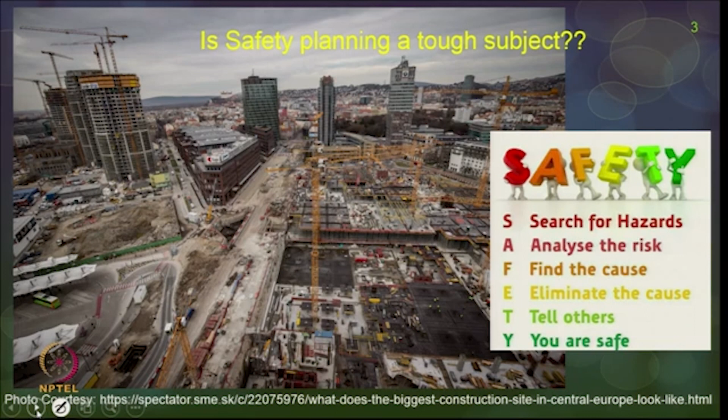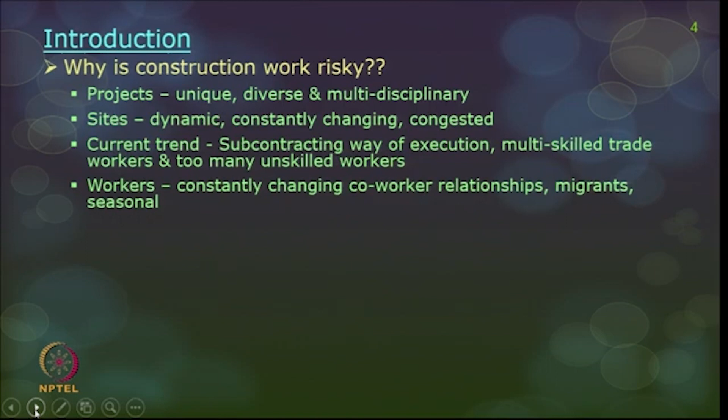Let us talk about why in construction we are not able to achieve a safe environment compared to other sectors. For example, safety is a major concern in every sector like aerospace or manufacturing or anything else. But why is it so fuzzy in construction, and why has it not been achieved even till date?

There are so many unique factors as regards construction projects alone, let us discuss a few of them. As such, let us talk about the projects - most of these projects are unique. For example, if you do manufacturing of a car, you may be manufacturing the same model repeatedly, so you know what the hazards are, you know the sequence without complicating too much, you know what safety precautions will suit you best, and so on.

In construction, projects are unique, so the learning you get in one project you may not be able to apply in the next four or five projects. That knowledge and experience you got from one project you may apply only after five or ten projects. That doesn't happen in other sectors.

Construction projects are always very diverse. You have so many engineers, starting from architects, structural engineers, MEP engineers, then your consultants, vendors, and suppliers. So many people come in and play their role. It is actually meeting different minds, and at the same time getting the work progress done while having a safe environment in place is quite challenging. As a result, projects are most often multidisciplinary.

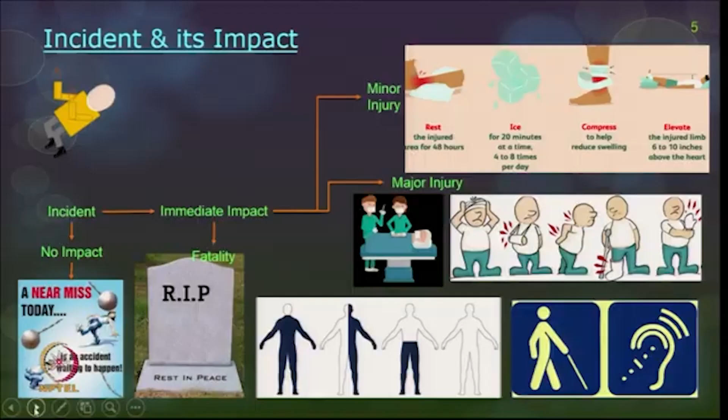The other type is a slow impact. There can be hazards which create slow impact onto workers. For example, if you work continuously with concrete or handle cement without proper gloves, after some time you may see a lot of cement dermatitis - that's primarily called cement dermatitis. These don't happen in just 1 or 2 days; it happens over several years, maybe 3 to 5 years, and some impacts can even happen 10 years later.

So these are all called health issues. Now if you look at incident impacts - I'm categorizing everything together - an incident can have no impact, called a near miss; immediate impact giving a minor injury, major injury, or fatality; and a slow hazard impact, which we call health issues.

If you look at the history of safety, which we'll discuss a little later, people were historically worried only about the visible impacts - what we call minor injury, major injury, and fatality. That's what was really seen by construction groups, and safety programs and policies were most often focused only on these safety issues in construction.

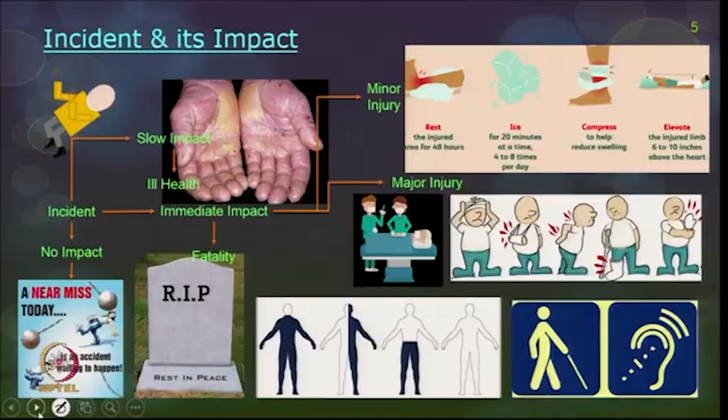Now let's talk about definitions. What is safety? Safety is always defined as an absence of danger or a state of protection. Next, a few terminologies from the previous slide - number one is incident. Any incident is an unplanned, unwanted, unexpected, unfortunate event which disrupts the work process and may cause an injury or damage.

Based on the impact, one type is near miss - incidents where no property was damaged, no personal injury sustained, but given a slight change in time or position, damage or injury easily could have occurred, and it didn't happen this time because of the luck factor.

Now there's something important in the definition. If you look at safety, most of the focus is only on personal injury - in the sense, only on worker injury. But safety as such has to take care of equipment, materials on site, and also personnel, which implies workers and other human beings on site. But colloquially, most safety norms and policies are primarily towards workers' well-being on site only.

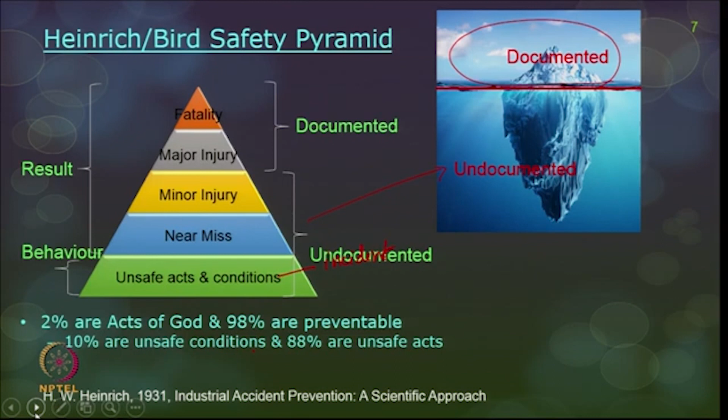Now let us talk about these unsafe acts and conditions. What are these? Unsafe acts are primarily related to workers or human beings. Unsafe condition is, for example, maybe you wanted to do substations in hilly terrain, or transmission lines in hilly terrain - you cannot change the situation at all. Hilly terrains have more dangers, and these are primarily referred to as unsafe conditions.

So what happens is, so far many people in construction think that safety is not actually emphasized, or we are not able to bring construction sites to zero accidents because of the dangers in unsafe conditions.

But a lot of statistics were taken up related to how accidents happen, how many accidents happened, what were the real reasons and so on. When it was completely analyzed, it was found 2% of all these accidents were acts of God, which refers to cyclones, heavy rainfall, tsunami, or earthquake. Fire is a man-made disaster, not a natural disaster. So acts of God can be anything related to natural disasters.

So 2% of accidents are related to natural disasters, and 98% of all these incidents happening at sites can be prevented - they are preventable. And if you zoom into that 98%, 10% of these causes are due to unsafe conditions, which you cannot avoid, or you can take efforts to safeguard your site. That is possible, but you may have to spend money on that.

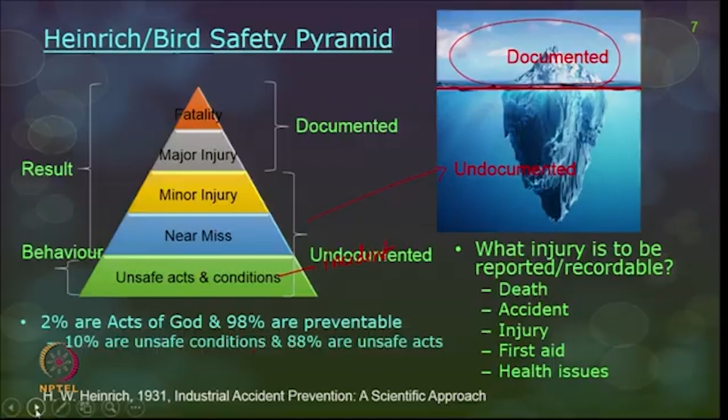Now what injuries have to be reported or recorded, so it acts as a lesson for future projects, so you can learn from a mistake. Any death obviously has to be reported: the reason for death, why and where it happened, what really happened, what the worker didn't do, what precautions the management didn't take. All this has to be reported.

Any accident in the site implying a major injury has to be reported for sure. Minor injuries, yes, if possible, and if you have a system in place to record all your minor injuries, that also has to be reported.

First aid cases, yes, including near misses, also have to be reported if you want a complete zero-accident record in construction sites. Near misses and first aid cases happen too often every day, but there should still be a policy of reporting and documenting everything, used as a learning lesson for all workers. Last but not least, health issues also have to be reported these days.

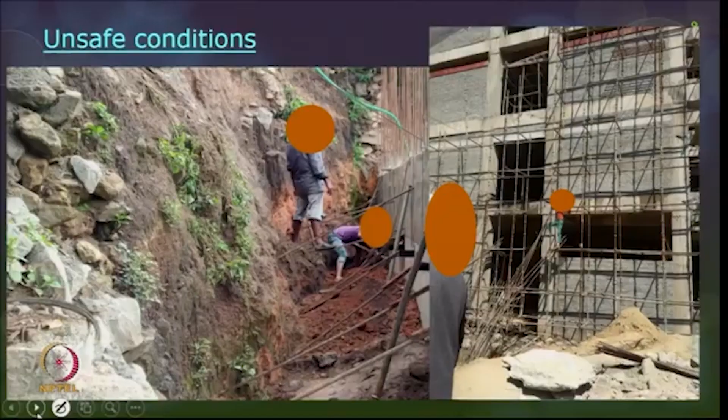Now let's talk about unsafe acts and unsafe conditions, two terms that have come up. Unsafe condition: if this place is too hazardous and dangerous, with no proper place for workers to stand and set up, and hardly any provision for safety precautions, as shown in this picture. You cannot avoid working on these scaffolds, climbing up and doing construction progress work. So this is primarily an unsafe condition, but there could have been provision for safeguarding the environment.

The next is unsafe acts. Unsafe acts are primarily ignorance of any safety rule. For example, in this first photograph, the workers are not wearing proper PPE, not proper safety clothes, shoes, or a hat while working in a construction site. And in this picture, a safety net, which is only meant to safeguard a worker or equipment that falls down, is actually being used like a dustbin to store unwanted materials.

So what is this unsafe act and unsafe condition? Unsafe act is an activity that is not done according to safety standards. Examples include failure to wear PPE, which is the number one unsafe act in construction sites. Ignoring tool defects - maybe you were operating equipment, it didn't work, and you don't report it to management but still try to operate and complete your work. Or you don't know how to operate equipment and try to mess with its functioning. All these are examples of unsafe acts.

Violation of health and safety rules - if you have to wear all your PPE like shoes, hard hats, and gloves, you have to work accordingly. Even if you are not comfortable, you should not remove the PPE and start working in a construction site. The next is unsafe conditions.

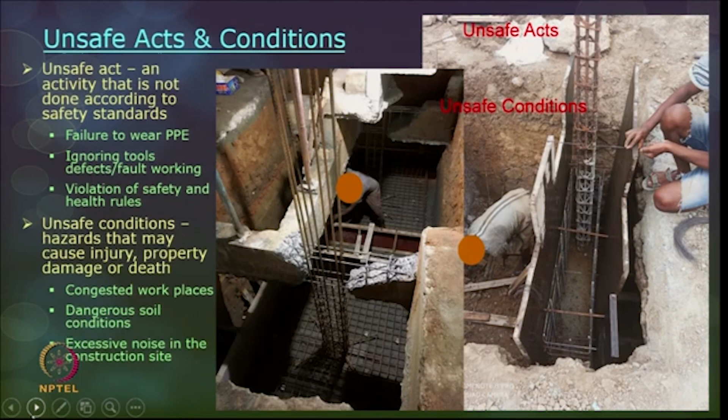Excessive noise in the construction site is also an unsafe condition. You may be working in a very big construction site, not operating any equipment yourself, but all around you there are so many equipments producing a lot of noise, many above the permissible decibel levels. When you are in the midst of so many equipments, your mind will not be at peace and concentrating on safety. So this is an example of unsafe conditions.

The next term which came along in the introduction was hazard. Many of these terms are used colloquially in so many places, but now you should learn the different terms and use the proper terms when talking about safety.

Hazard means an inherent property or ability of something to cause harm. As such, hazard is not dangerous, because there are three types of hazard, which we will discuss when talking about hazard analysis as a safety program. So every hazard is not active and it will not create any harm.

For example, there is an electrical wire passing along a line with equipment connected to it that was operating, so this is primarily an active hazard. If you slip or trip onto the electric wire and fall off, it can create a lot of hazard. Let's complicate the issue further: maybe it's lying along a floor where curing is happening, and curing has water beneath it, so then it becomes a very serious and active hazard. Hazard as such has to be identified in any project.

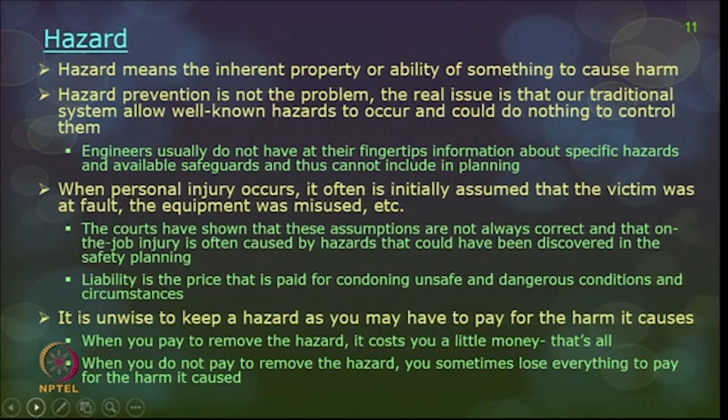That generally doesn't happen, because once the courtroom proceedings are over, it goes into the files and is not open to the public to be kept as lessons learned for other projects. So it is unwise to keep a hazard, as you may have to pay for the harm it causes. When you remove it, you have to spend a lot of money, but if you don't try to remove it thinking you may have to spend money, you may have to pay even more than anticipated. Sometimes you may have to lose everything to pay for the harm it caused. That is the real message behind hazard.

Some researchers have also identified the top hazards in a typical building project, and a few of them are: fire, unsafe scaffolds and working platforms, open shafts and edges, unsafe electrical equipment, unsafe excavations, unsafe cantilever loading platforms, struck by foreign or falling objects, unstable or unsafe structural members, overloaded vehicles and forklifts, unstable mobile cranes, unsafe lifting operations, unsafe working at height, unguarded machinery, and unsafe access or egress.

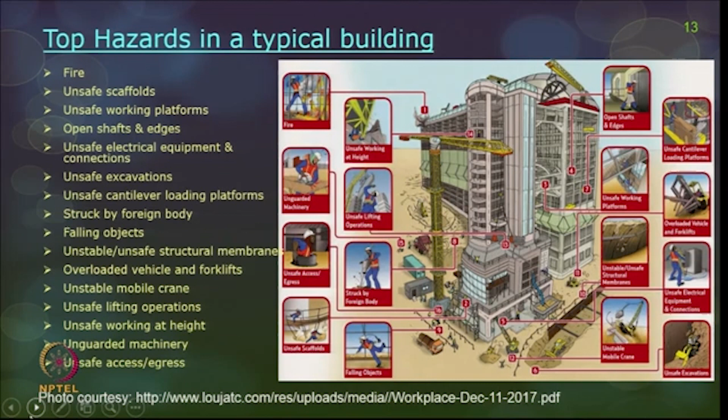So there are a lot of hazards still present in construction sites, and if you closely watch a project and note all this down, you can actually think of a lot of corrective and preventive measures for accidents.

Now let us move on into the terminology. So far we have discussed terms like fatality, major injury, minor injury or incident, near misses, unsafe acts, unsafe conditions, and hazard. Now we will move back to what fatality, major injury and minor injury are, and how these stand in the present scenario in construction sites.

As I told you, this pyramid has a lot of numbers attached to it. Heinrich proposed that for any one major injury there might be almost 29 minor injuries and 300 near misses, in a ratio of 1:29:300. A lot of researchers have given different numbers, and these numbers have come from different times and from different groups of construction projects.

If you want to know these numbers, it is quite necessary because you have to think of safety precautions, how many safety programs and how much investment in safety you make, primarily based on some assessment of these numbers in your project. So you may need an understanding of the number. Accordingly, other ratios are 1:100:10,000, 1:10:600, and so on — there are many such numbers available.

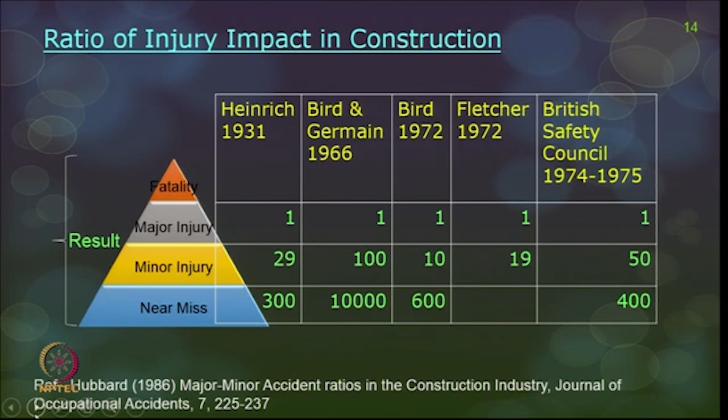But understand, the pyramid always has so many near misses compared to major injuries, and so many minor injuries compared to major injuries, and the same way to fatality. So that pyramid is still existing.

Now let us talk about fatality. We will go again from severe impact to the least impact. So number one is fatality.

If you look at projects which happened 50-60 years back, like the 1940s, 1930s, or 1869 and so on, there are very famous projects existing even today which are treated as wonders of the world. But if you talk about safety and the number of fatalities that happened, many of these are considered deadliest construction projects. Let us discuss a few of them.

Great Wall of China had almost 10 lakh deaths during construction, and this is only the reported case. So the Great Wall of China had many deaths during construction.

The Burma-Siam railway is actually treated as a death railway because so many workers died during its construction - almost close to 1 lakh people died. The Suez Canal had again 1,20,000 deaths.

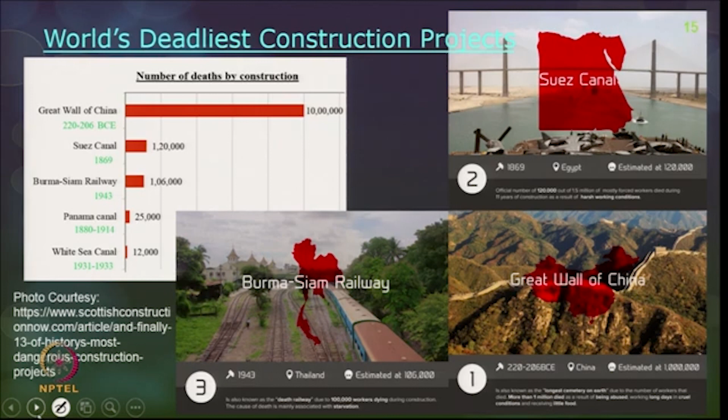So these earlier projects had so many deaths, and then onward safety became a serious concern, and now a lot of this fatality has really been cut down. Today, where are the fatalities in a construction project?

If you look at comparing with other industries - building construction, which is primarily a standard industrial classification, is at 25%, heavy construction other than building construction has 19%, and special trades 56%. This is the statistics given here. So building construction and heavy construction are still having a high number as far as fatality is concerned.

If you look at comparing with other sectors, for example transport or warehousing, agriculture, manufacturing and mining, construction is still ranking number 3. Construction is even more hazardous than mining and manufacturing - that you should note down. This is a record as of 2018 on fatality.

So we still have to improve on fatality rates in construction. Now if you look at the trend over the last 10 years, there was a steady decline in fatality, and again the rate of fatality has increased.

This is primarily a report which has been seen. So from 2016 onwards, let us see the number of construction fatalities: 991, in 2017 it was 971, in 2018 it is 1008, and so on. So it is still a 3-digit and 4-digit number oscillating between here and there.

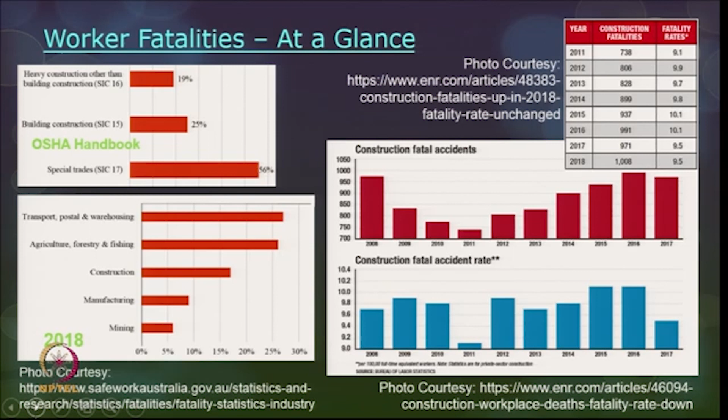There can be so many reasons - maybe there were fatalities which were not reported and the reasons were not identified, so it was not reported. There can be real reasons behind the fluctuations in the death rate, but you should still understand that fatalities are still happening in construction sites, which has to be cut down.

Now, there is one infographic which says, according to data from the Bureau of Labor Statistics, for 10.3 million workers employed in the construction industry, 991 construction workers were killed on the job. That is the statistic we saw in the previous slide for 2016. For these 991 fatalities, almost 82,760 non-fatal injuries and illnesses have happened.

This is actually a combination of major injury and minor injury put together. So what people generally say is, more than fatality, major injuries are a real pain and major problem to construction workers. Fatality means the worker is no more, and only his family suffers as a result of the loss of the worker.

But when you talk about major injury, a person has to survive the remaining part of his life either without his eyes or without his legs or without his hands, and he has to be dependent on someone for the rest of his life in order to go through it. That is where major injury is treated as very serious, even compared to fatality.

Instead of death, a construction accident can often cause very serious injuries, and deaths resulting from construction accidents are in some ways easier than traumatic injuries or illnesses. What about coma or major brain injury where the person is on bed rest and so on? These are all real serious pain and suffering compared to even a fatality. So immediate death has some advantages also compared to all these major injuries.

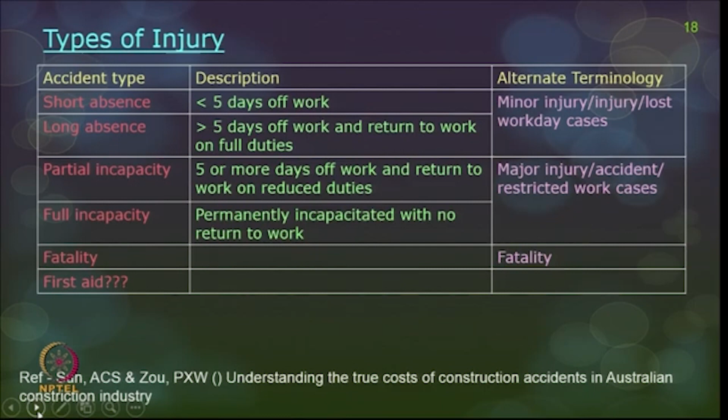Now let us talk about this disability classification. A lot of researchers have talked about so many terminologies. One is short absence, long absence, the other is total incapacity or partial incapacity. Now we will be discussing permanent disability and total or partial. So total, partial, permanent and temporary.

Again in reverse order: total permanent disability, wherein the worker after the incident has happened - there are two scenarios, pre-incident the worker was fine and fit, post-incident what is his status. In total permanent disability, he will be totally disabled and permanently disabled. There is no surgery or alternate solution provided for him to be fit enough to do any job in the construction site. So it's a condition in which an individual cannot work due to injuries - examples can be total paralysis, brain injury, mental incapacity, or amputation of both hands and legs, both hands or both legs together - then he is not fit enough to do any job later on. So he is jobless after the incident has happened.

The next one is partial permanent disability - partially he is disabled and permanently he is disabled. For example, loss of one eye - with the other eye he can still manage and do some job. So partially he is disabled, so he can do some less risky job in the construction site. He may be employable, but the loss of vision on one side is permanent. This is a disability that impacts one's day-to-day functioning in the workplace. These injured workers generally go back to work once their treatment is over and they are fully recovered, but they cannot do the work with full capacity as they were doing before the accident happened. Examples can be hearing loss, blindness, or post-traumatic stress disorder and so on.

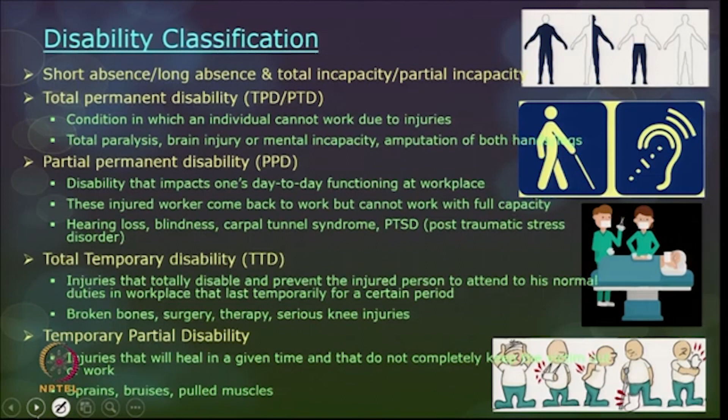But all these result in absence, some sort of productivity loss at the construction site. So any accident that happens, the immediate impact is an absence - maybe a short absence or a long absence - and immediately productivity loss happens in the construction site. That you have to keep in mind.

Now we will talk about minor injury. In the previous slide we talked about full capacity, disability, and so on. Now what are these minor injuries? Examples are laceration - for example, a worker has fallen down from the nth floor onto the ground floor, maybe onto reinforcement, and the reinforcement rod has pierced him in several places. So it is not a regular cut with sutures, but irregular cuts with sutures. This is primarily called laceration.

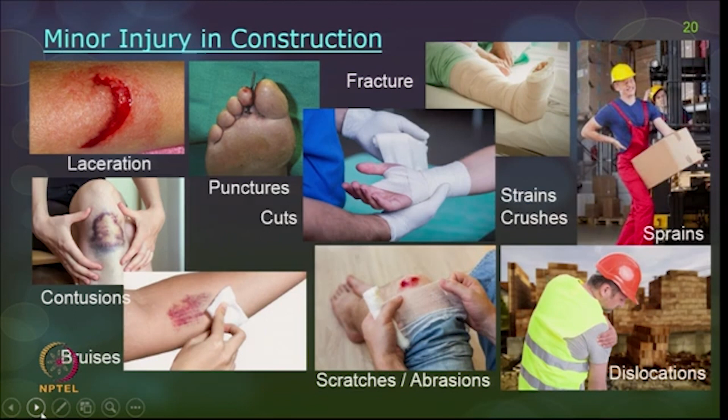Punctures - the previous slide on hazards showed you that a nail on lumber can be a real example for a puncture or a cut. Fracture is a very common term. Strains, crushes, sprains, dislocations happen because of wrong lifting or too heavy loads. Scratches or abrasions occur when you are handling reinforcement steel or something that doesn't have a smooth surface - if you handle it bare-handed, you may get a lot of scratches and abrasions. Contusions, bruises, or internal bleeding happen as a result of some accident at the construction site. So these are all classified as minor injuries in construction.

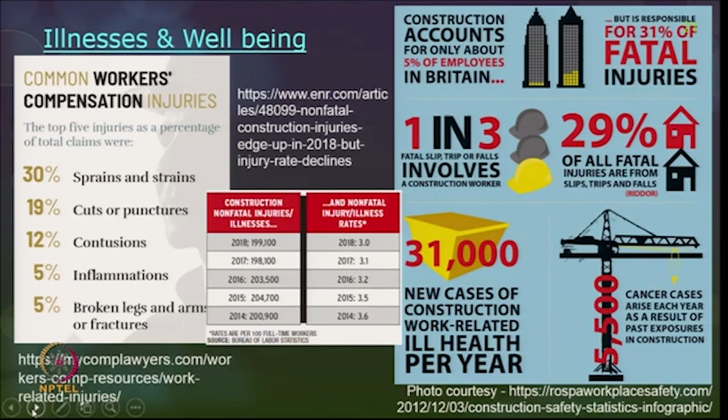If you look at compensation for workers in terms of minor injury, 30% has been spent on sprains and strains, 19% compensation was primarily on cuts or punctures, 12% on contusions, 5% on inflammations, and 5% on fractures. So that is where most of this compensation was paid to workers for minor injury.

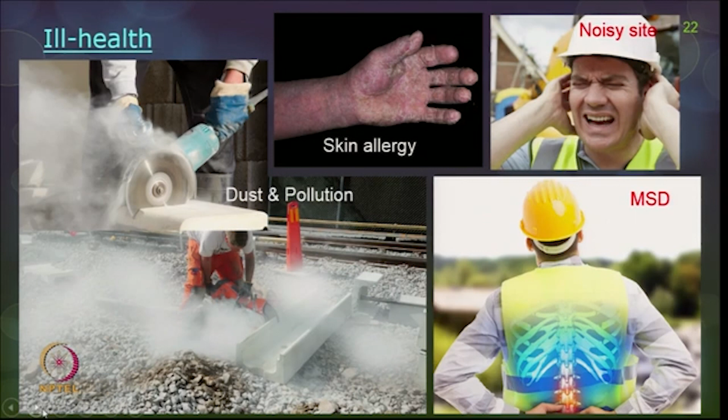Now let us talk about ill health. Ill health examples - the main example is dust and pollution. Any construction site, you cannot avoid the dust and the pollution as a result of the dust. The other one is allergic reactions, primarily because of cement, since every construction these days is dependent on concrete. So skin allergy or dermatitis is the number one health hazard you may see.

The other one is noisy site, because of lots of heavy equipment handled in the construction site. Noise levels cannot be compromised in a construction site. Over some period of time, hearing impact or hearing loss can happen if you do not take proper precautions. The other one is musculoskeletal disorders as a result of wrong lifting of loads. Maybe you have to call a co-worker and get his help in lifting loads if they are too heavy. Instead, if you start doing wrong liftings, you may end up with musculoskeletal disorders.

So what are these adverse health effects? There are so many. We will talk about health issues in one of the coming classes. Any change in body function or the structure of cells that can lead to disease or a health problem. This can include a disease or change in the way the body functions, grows or develops, effects on children, grandchildren and so on. Some problems can be transferred through heredity. Decrease in lifespan, change in mental condition as a result of too much stress or traumatic experiences, and effects on ability to accommodate additional stress. These are all examples of health issues.

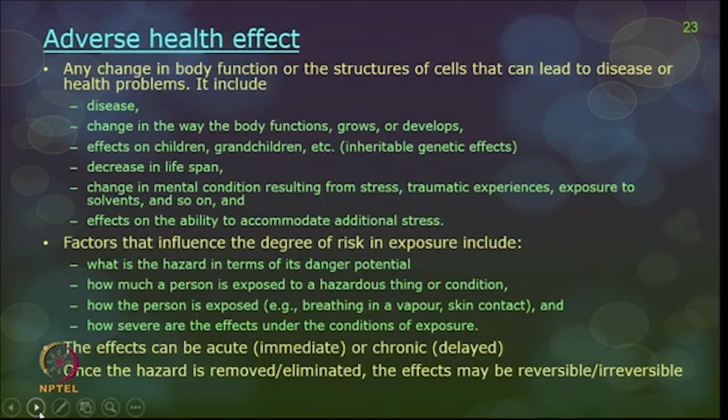Now the other issue to keep in mind is, once the hazard is removed, eliminated or safeguarded, the effects can sometimes be reversible, and sometimes not. For example, if you start taking treatments and avoid cement exposure or dust exposure, slowly you can be completely recovered. But with solvents or explosives that have affected workers, some of the effects are not reversible—they are irreversible.

Now what about the growth of the construction industry? So far we have talked about all the terminologies with regard to accidents, starting from fatality, major injury, minor injury, and near misses, and also ill health. Now, construction projects today are not like how they were earlier.

So what was the growth of the construction industry? Let us not talk from too far in the past—let us talk maybe from 40-50 years down the line. So from 1960 to present, what has happened? We've gone from low-rise building structures to lots of skyscrapers and infrastructure projects these days, like metro systems, airports, and so on.

If you see the trend, several famous, iconic, challenging or mind-blowing structures in the world were built only after the 1980s, with few exceptions built before that. Most of these structures were built only in the recent past. So there is a real challenge happening with the recent trend in the growth of the construction industry, which is posing lots of new hazards and new threats to safety on construction sites.

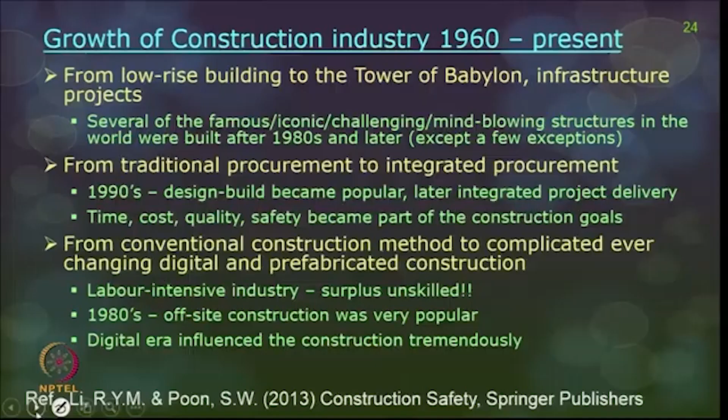The digital era also influenced construction tremendously these days—BIM and other technologies came in. As a result, we are able to move into robotics, 3D printing, and use drones for a lot of safety precautions. Laser scanning and other technologies have all been there to help construction growth. So projects are always having a lot of change in trend these days.

Now, let us start looking at what are the causes of construction accidents, as a result of the growth in the construction industry over the last 50-60 years.

Number one, we will categorize it as human issues—human error, misjudgments, unsafe acts and so on, and relationship with colleagues. Because of the subcontracting way of relationships, you may have a loose relationship with colleagues, which may be a real reason for accidents. Suppose you have a lot of friends moving as a gang from one crew to another—obviously your friends will tell you about the potential dangers in the construction workplace.

With immigrants, there may be a poster in the local language—maybe in Hindi or something—and the person who is an immigrant may not be able to read that language, so he may not understand what is written there. So diverse culture and language is also a cause of accidents.

Insufficient safety training and education—most of these issues are common sense. You should always know that you should have proper PPE when working on a construction site. Most of it is common sense, but that doesn't mean common sense is equivalent to safety education. So there should be proper training and education on safety, and workers should be reinforced on safety every now and then, maybe in toolbox meetings or during safety training.

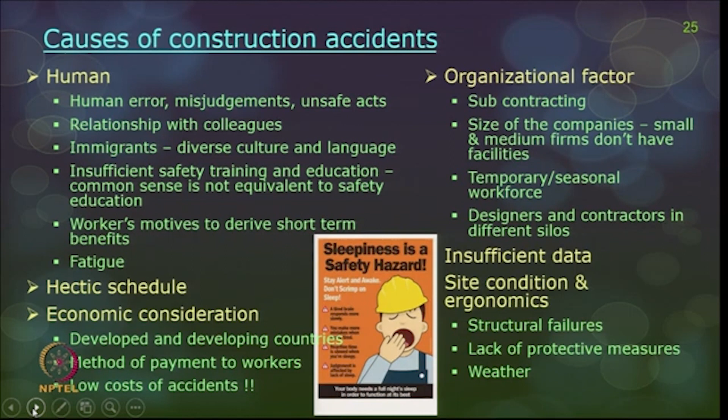That is obviously true for site conditions and ergonomics too - structural failures, lack of protective measures, weather is again another issue. When you have bad weather, for example heavy rainfall, heavy snowfall, or a very hot summer, you should not expect too much productivity from the workers in the construction site.

Now, why prevent accidents? There are so many reasons. Humanitarian reasons - the one which is not documented anywhere, that is primarily human suffering. It can be physical pain, hardship resulting from death or disability. With the loss of one earning worker, the family has to suffer the loss and still go ahead with their lifestyle. Then there's the physical pain if there is a major injury - all this has no way to be documented, and these things should not happen. So accidents have to be prevented.

Moral reasons - till date, construction is always treated as very dangerous and so on.

So this awareness has to be taken care of. Worker morale can always be strengthened with a lot of other programs, safety programs in the construction site, but still the workers have to have a positive feeling that sites are always safe.

That is another reason - legal reasons. Civil law also enables injured workers to gain compensation, citing that a reasonable standard of care and protection was not provided. So it is primarily the employer's duty of care to give a proper, safe site and safe place to the workers.

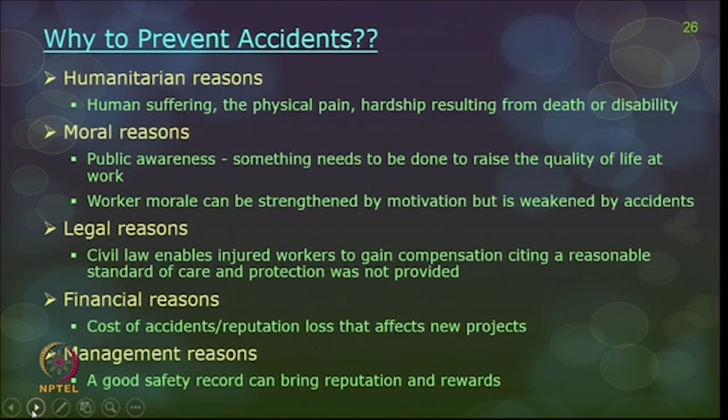Management reasons - a good safety record can bring a lot of reputation and rewards to the workers.

So when do these injuries occur? Let us talk about when and how these injuries occur. Although there is no specific pattern on how these injuries occur, statistics show that there is a pattern available in a construction site, and if you closely watch, the pattern is also linked with some logic and some gut feel sense. So there are no hard and fast rules that tell when most injuries occur in a particular project.

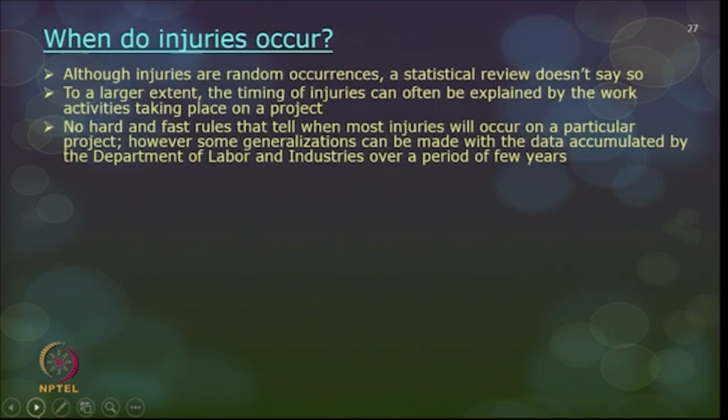However, some generalizations can be made with the data accumulated by the Department of Labor and Industries. Over a period of years, some statistics were gathered, and this can change from project to project - this is not a recent report, this happened several years back. So you may have to think about it and try to formulate statistics to create a new record on how injuries are happening in your construction project site.

Hour of the day - what happens is, in a normal construction site, a regular project, not the exceptional ones, maybe the project starts at 8 o'clock in the morning, and the workers start reporting to the site. As soon as they start reporting, they report to the site supervisor to get to know what their work is for the day, and then they start collecting their equipment, tools and so on. By the time they reach their construction workplace, it is close to 8:30, or sometimes even 9 o'clock.

If there is a small briefing, a safety precaution, or some gathering to happen, and then they move to the site, work generally starts by 9 o'clock. As soon as the construction worker starts their work, the productivity of the worker is never at the maximum. It takes some time for the worker to get into the work, his mindset into the workplace, and only by 10 o'clock or so does the work start picking up.

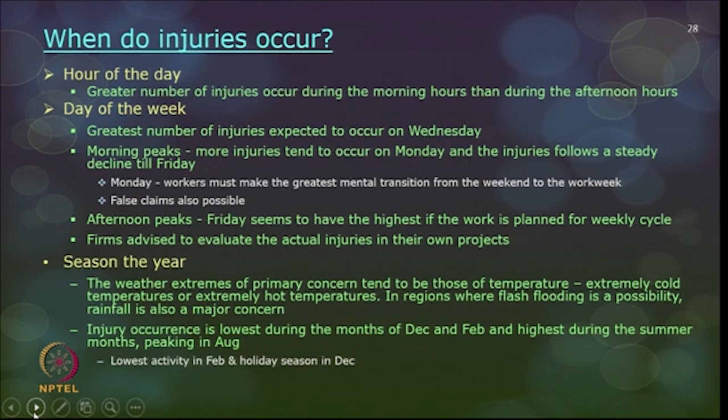Season of the year: extreme weather should be a real caution. When we talk about health hazards, we'll discuss cold stress, heat stress, and so on. Extreme cold and hot temperatures are generally a serious concern — give adequate breaks to workers and don't impose a hectic schedule. Also, rainfall, where it's a possibility in some regions, should be taken into consideration when construction works are happening.

So, recap: types of accidents in construction sites. So far we've talked about total disablement, partial disablement, vehicle-related injuries, unsafe-acts-related injuries related to workers' misbehavior on site, unsafe-conditions-related injuries, location of injury — whether external or internal organs are injured — and so on.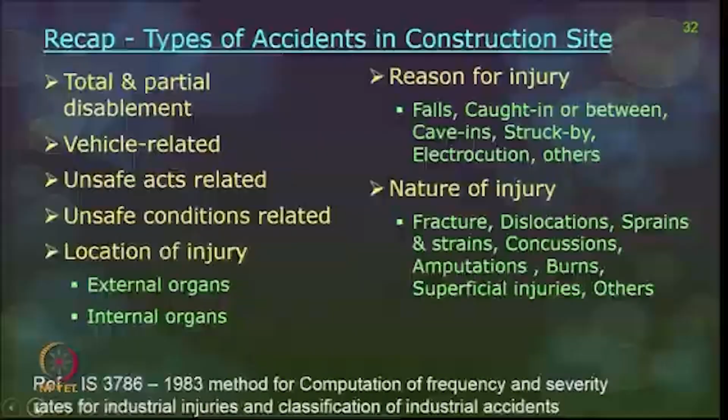Reasons for injury, we will see a little later. From week 3 onwards, lectures will be arranged along falls, caught-in-or-between, cave-in, struck-by, electrocution, and so on, and the operations where each hazard is seen to the maximum will also be covered alongside these hazards. We'll see this from week 3 onwards.

Nature of injury: again, fracture, dislocation, sprains, strains, and so on.